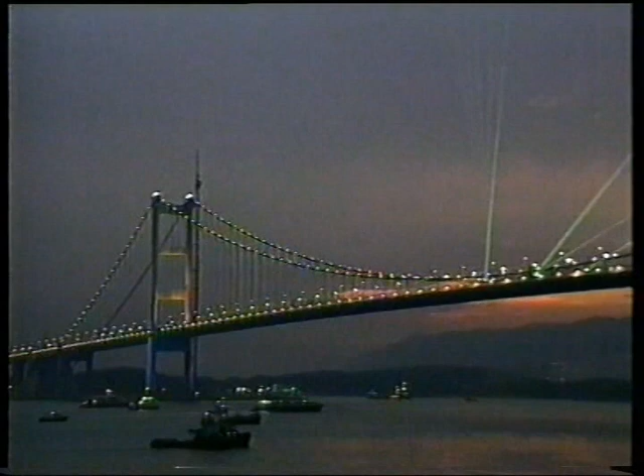The Tsing Ma Bridge, part of the Lantau Link, was officially opened by Lady Thatcher on the 27th of April 1997.

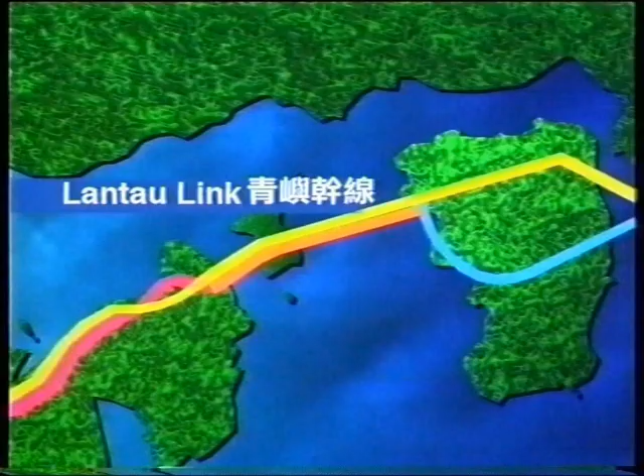The Lantau Link project was started in 1992 as one of Hong Kong's 10 massive infrastructure projects costing approximately 1.8 billion US dollars. Consisting of a suspension bridge, a cable-stayed bridge and a viaduct, the Lantau Link is the vital connection between the new Chek Lap Kok Airport and the urban areas.

The Tsing Ma Bridge, connecting the islands of Tsing Yi and Ma Wan, will be the longest road and rail suspension bridge in the world. With a span of 1,377 meters, it will carry 6 lanes of traffic on its upper deck and 2 rail tracks on the lower deck.

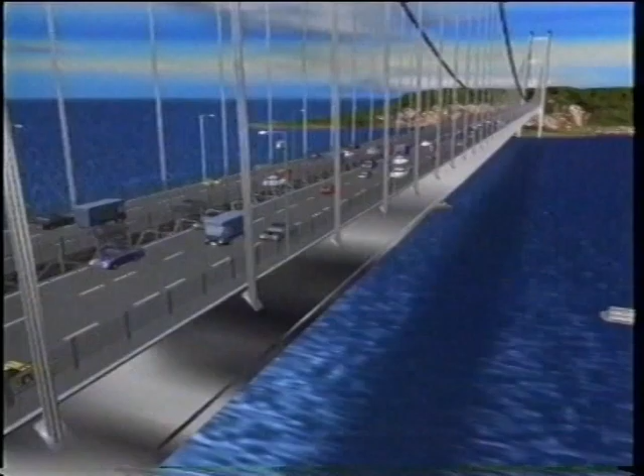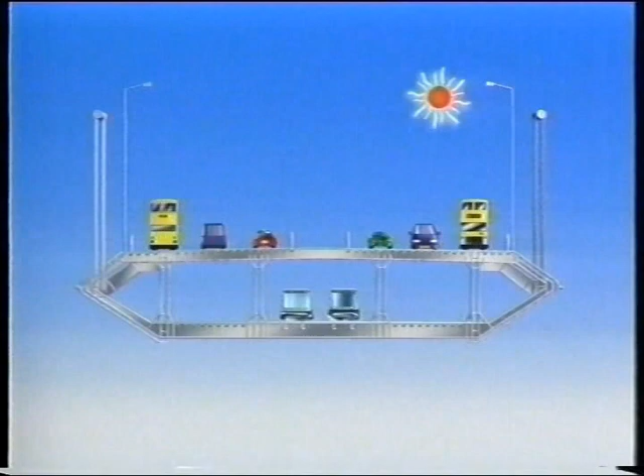As the bridge will be the only highway and railway link to Lantau, the designers made certain it would first provide free access under all weather conditions, second, be protected against collisions by ships, and third, be stable during high winds. Traffic will normally make use of the top deck, but under severe weather conditions, the bottom deck inside the box would be used.

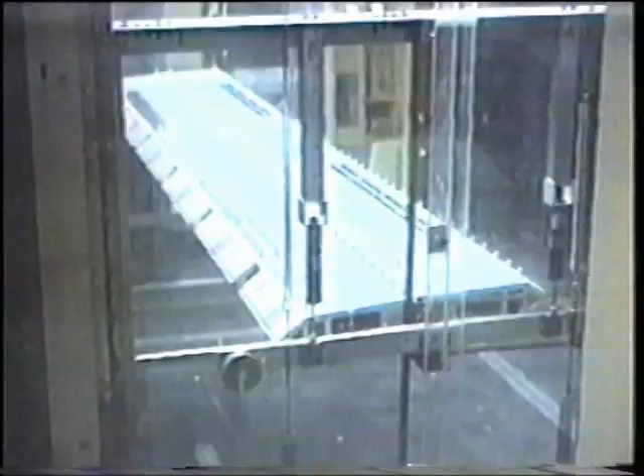Second, the bridge will be protected against possible ship impact. This is why the Tsing Yi Tower has been placed on land, and why the Ma Wan Tower has been located in shallow water surrounded by an artificial island. Third, the bridge has been designed to withstand the very high wind speeds experienced during typhoons. To make certain of this, extensive wind tunnel tests were carried out both in Canada and the UK.

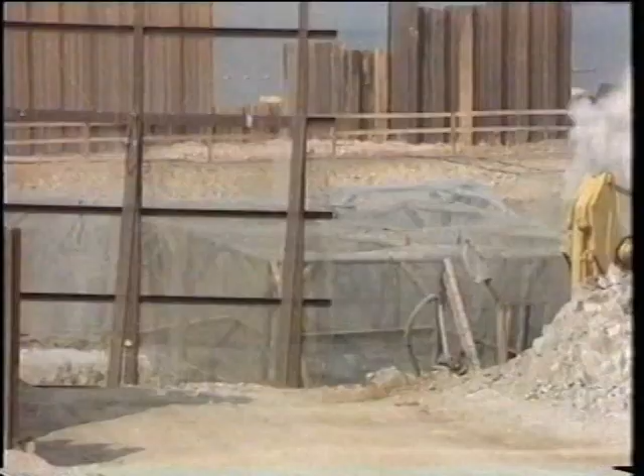Work began in May of 1992, and with its scheduled completion date of May 1997, the project will take 5 years to finish. To construct the bridge, the Highways Department of the Hong Kong government selected an international group of contractors who have built some of the longest and largest bridges in the world. The total value of the contract was 900 million US dollars.

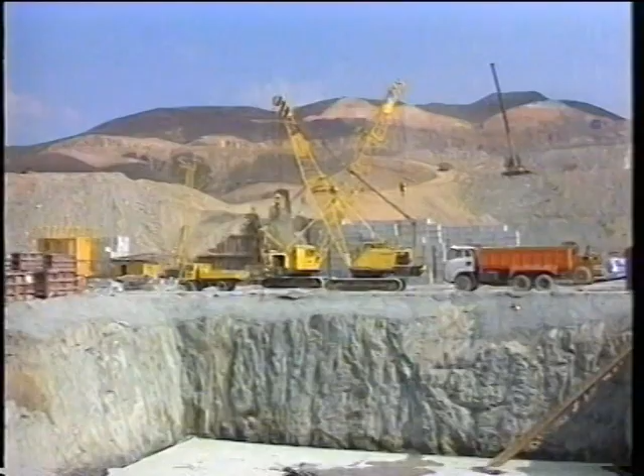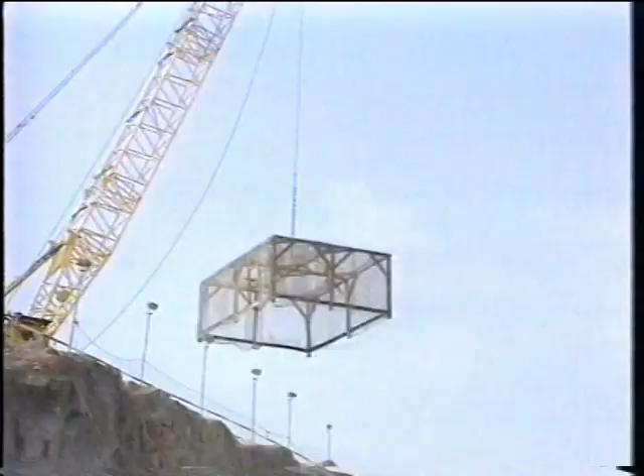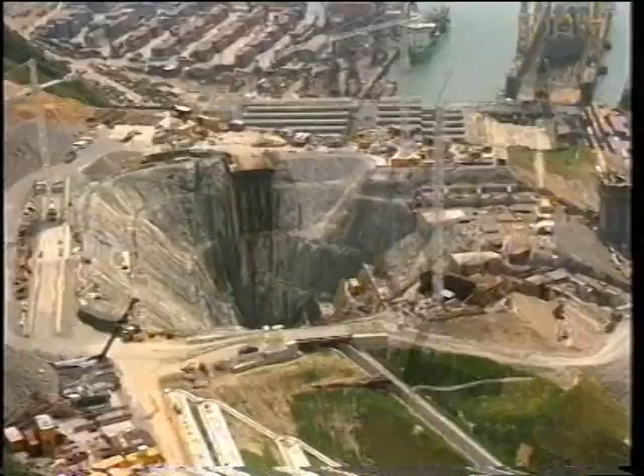Initially, the work involved an enormous amount of excavation below ground level on small, steep and congested slopes at each landfall. The largest excavations were for the 2 anchorages, which will restrain the load of the bridge's suspension cables. On Tsing Yi, a massive excavation 55 meters deep was carried out.

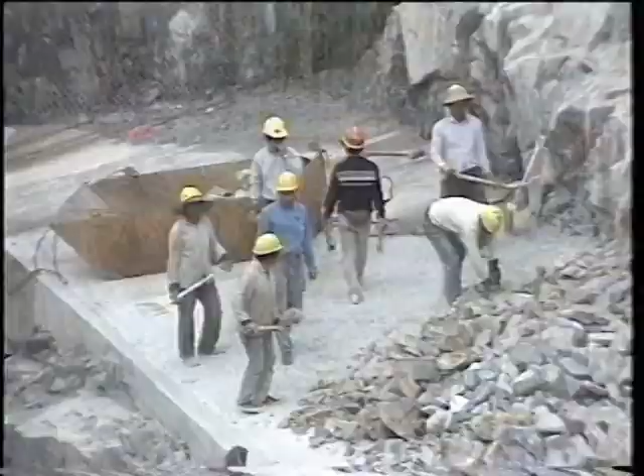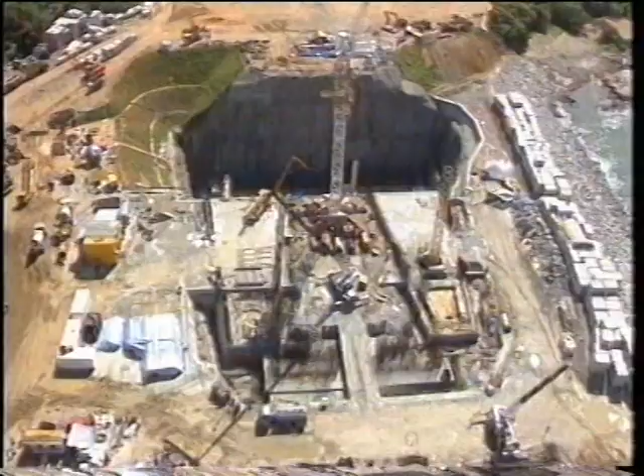At Ma Wan, the anchorage was partly underground and partly above ground. Below ground, the excavation went to a depth of 20 meters. Work has already begun on placing the basement and walls of both anchorages, which will eventually be filled with concrete.

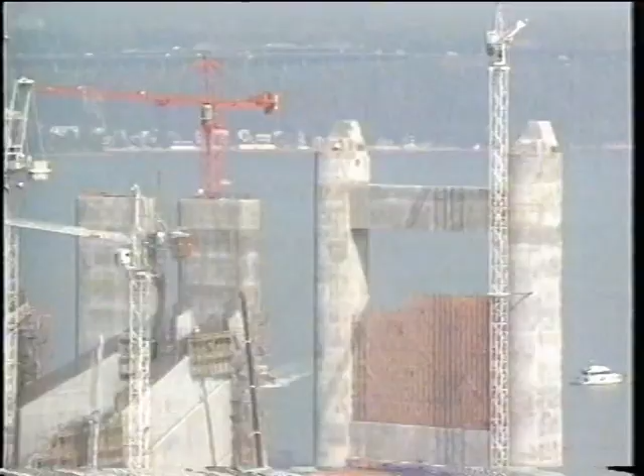The Tsing Ma Tower is on a spread foundation. Each leg of this tower is supported by a reinforced concrete footing 27 meters long, 19 meters wide and 7 meters deep, which rests firmly on solid rock. In the footing, all reinforcing steel bars have been epoxy coated to give additional protection from the marine environment.

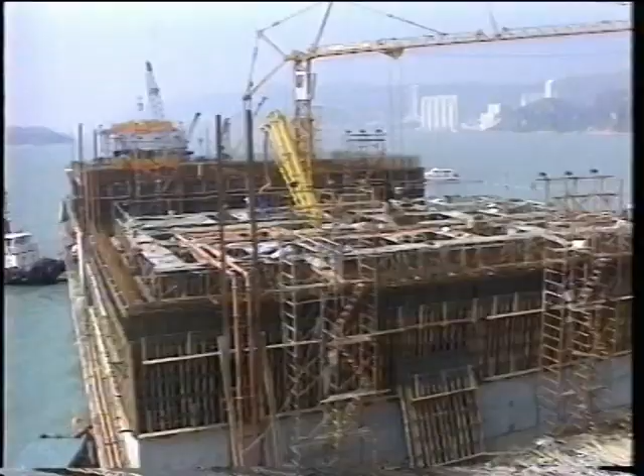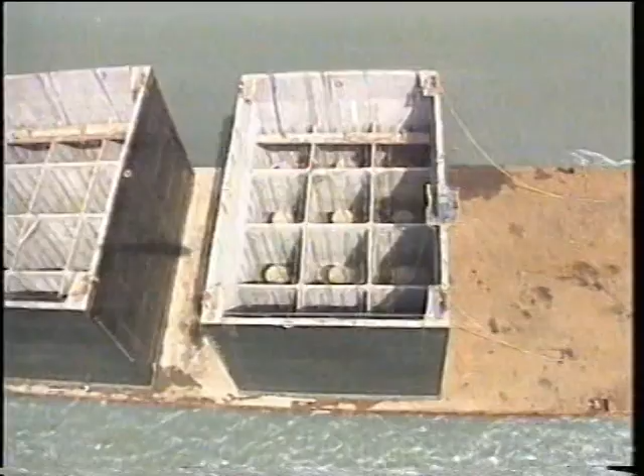Two huge concrete caissons, which will become part of the foundation for the Ma Wan Tower, were cast on the deck of a submergible barge anchored near Tsing Ma. Both are 28 meters long, 20 meters wide, with one 17 meters high and the other 19 meters high.

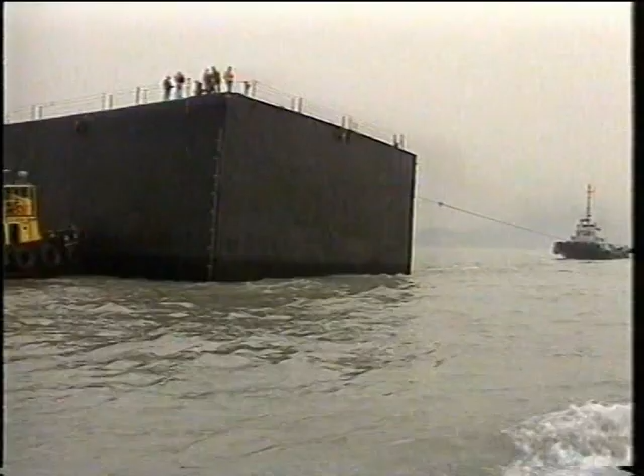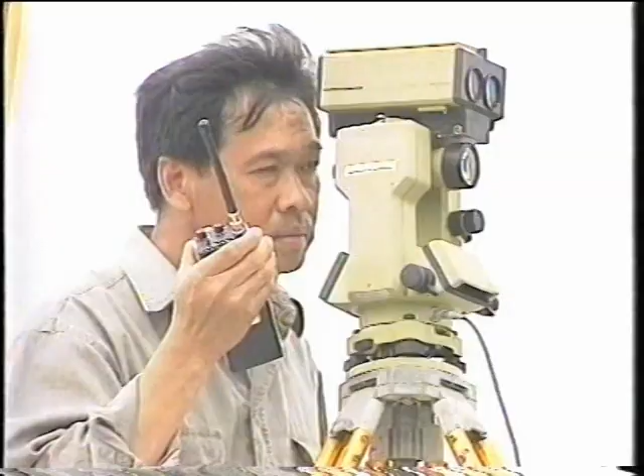The Ma Wan Tower foundation is located in shallow water of about 12 meters deep. Preparation work of the foundation included underwater blasting to flatten the area on which the caissons will rest. When the Ma Wan site was ready, the two caissons on the barge were towed to a site off North Lantau. After sinking the barge by adding water, the caissons were floated off. They were then towed to the Ma Wan site. At Ma Wan, the caissons were positioned and aligned properly.

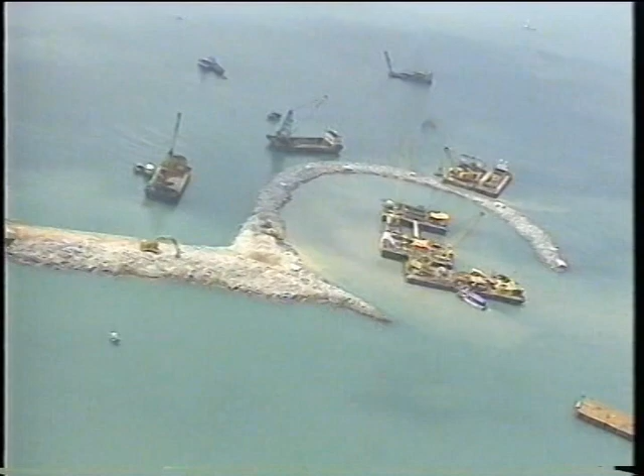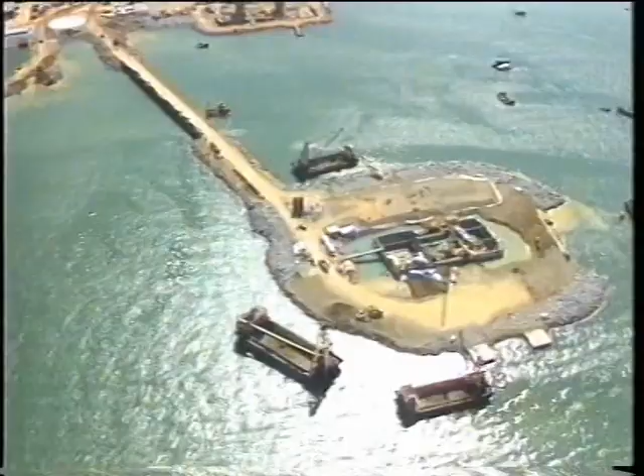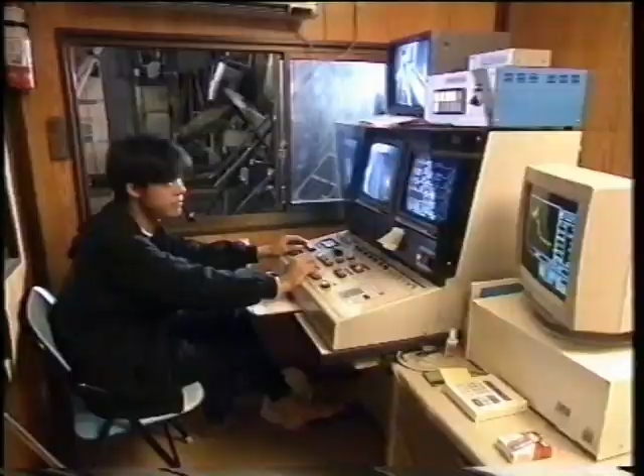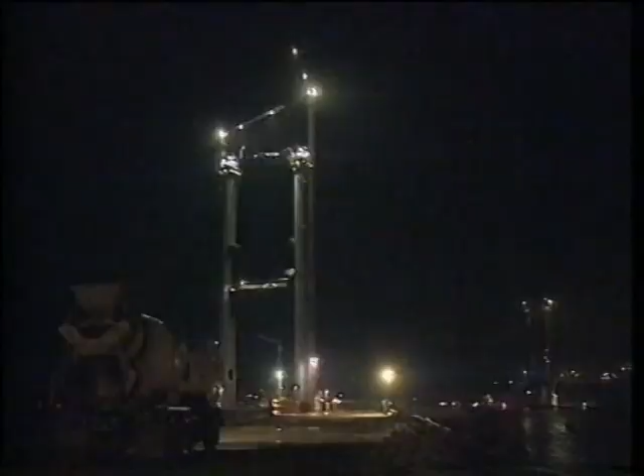To protect the tower from ship impact, rock and selected fill material was placed around the foundation of the towers to form an artificial island of an area about 4 hectares. The most prominent feature of the Tsing Ma Bridge will be its twin towers, each of which will stand at a height of 206 meters. These towers are made of high-grade concrete, which is batched in 2 computer-controlled plants on site. Using this concrete will make the towers capable of withstanding the most severe weather conditions.

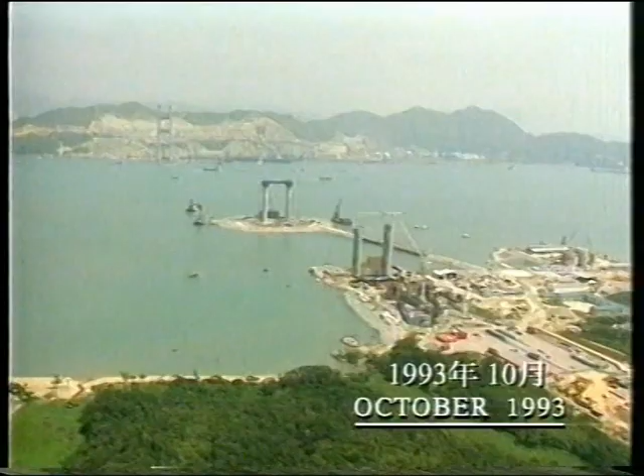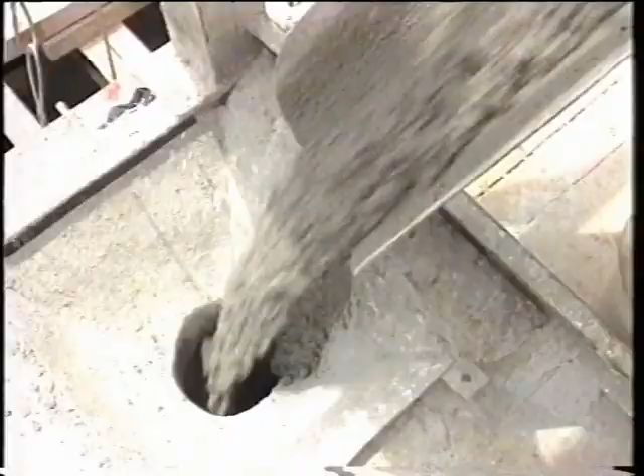The construction of the towers was completed in a period of only 3 months. This was made possible by concrete slip forming. That's a technique whereby you use steel formwork 1 to 1.5 meters high, and the concrete is placed inside and vibrated, and by the time the slip form moves vertically, climbing itself on jack rods cast into the concrete, it will be hardened or stiffened at the underside of the formwork. To ensure the tower's stability, particularly in high winds, portal trusses cast in concrete were installed between each leg.

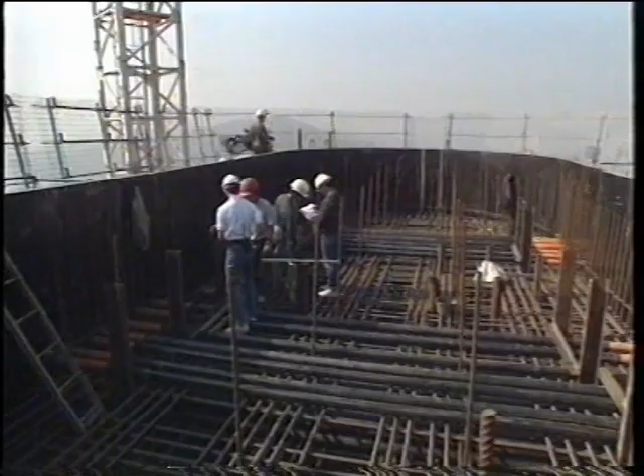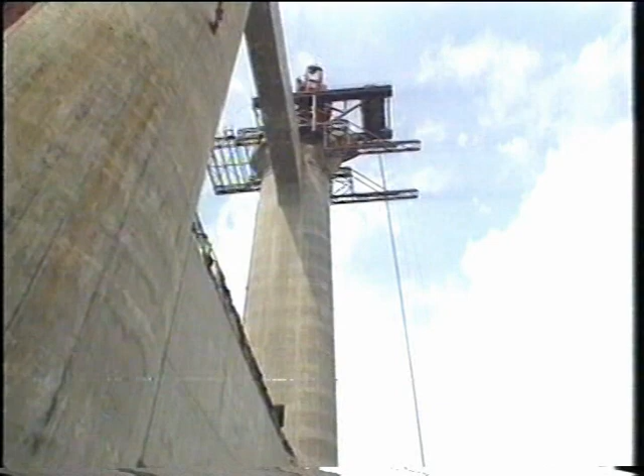The next step is to prepare the top of the towers for the installation of the large steel saddles that will support the main suspension cables of the bridge. A saddle is composed of 3 pieces. Each piece of approximately 130 tons was lifted up to the top of the tower by strand jacking technique. Once at the top, each piece is aligned and then bolted together.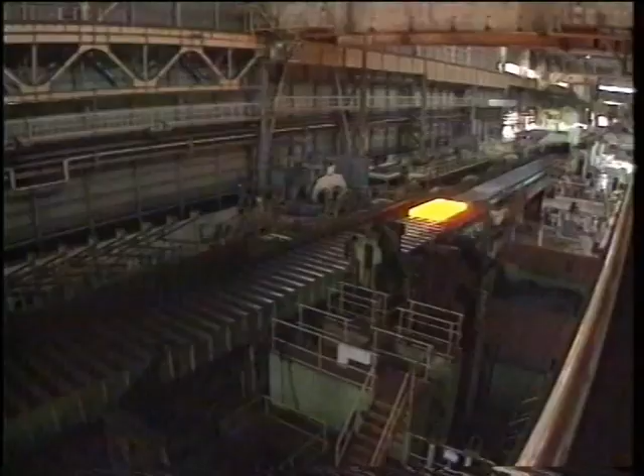In order to ensure the Tsing Ma Bridge is constructed on time and within budget, the staff of the Highways Department administers the project closely and normally holds regular meetings with consultants and contractors to monitor the construction progress. The international nature of the bridge extends not only to the engineering expertise involved, but also to the structure itself.

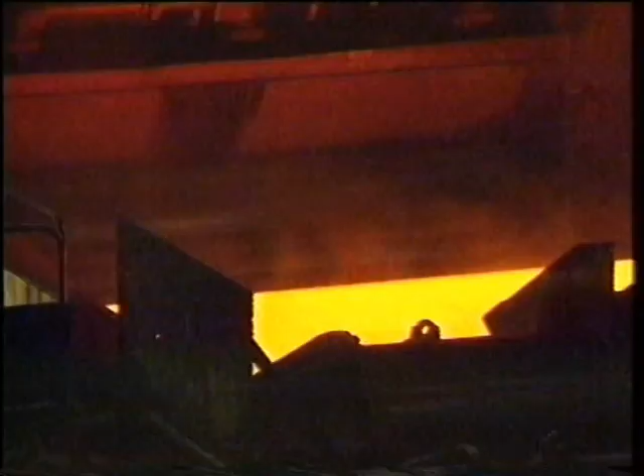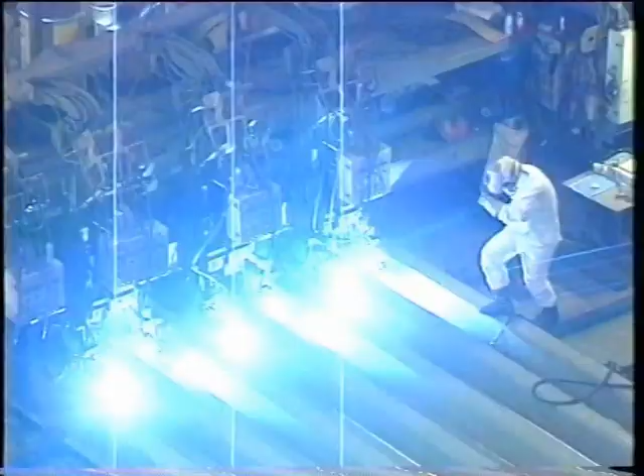In Japan, manufacturing and fabrication of the structural components, such as the trough and plate girders for the deck units, are being carried out. A large steel plate is first manufactured by hot rolling. Then it's flame cut into pieces with approximate dimensions for deck trough and plate girder fabrication. The deck trough is formed by upside-down welding of the trough to the deck plate by 6 heads welding simultaneously.

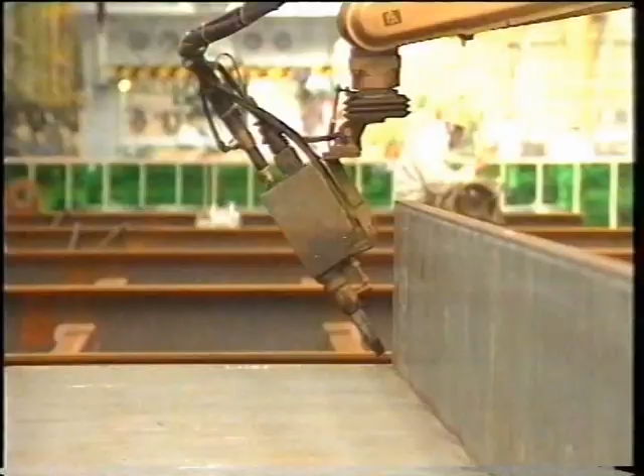This is the fabrication yard in Japan. Similar work is also being done in the UK, as well as machining of the cable saddles and their supporting grillages.

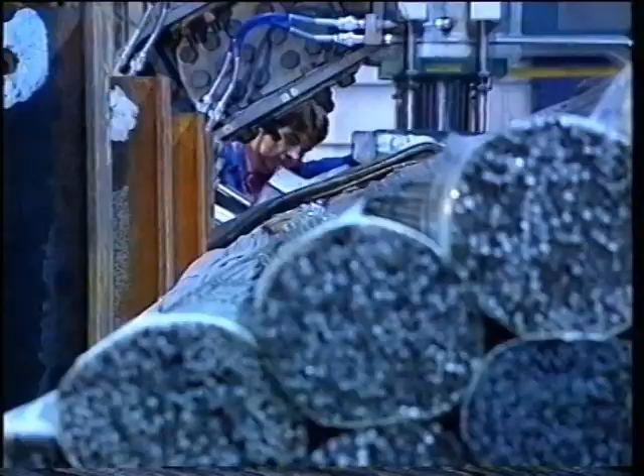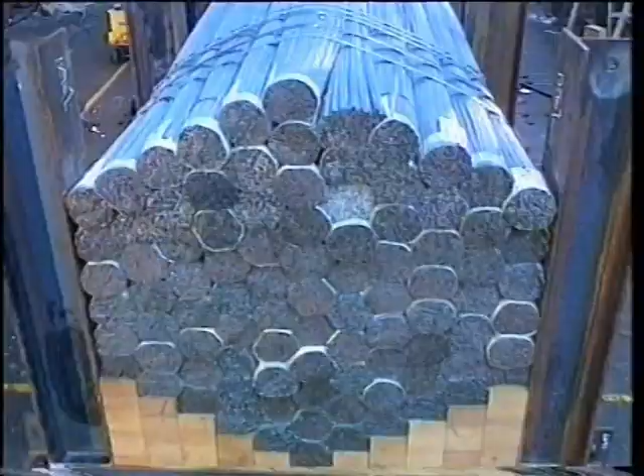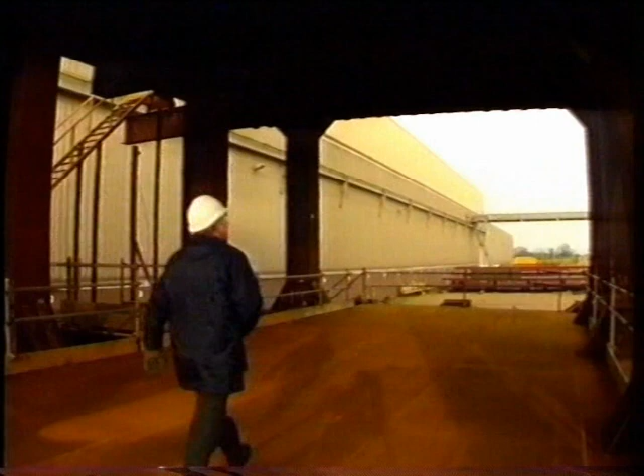A trial cable compaction for the 1.1 meter diameter main suspension cable was carried out. A trial assembly of a half section of a complete deck unit was carried out before the components are transported to the final assembly area in China.

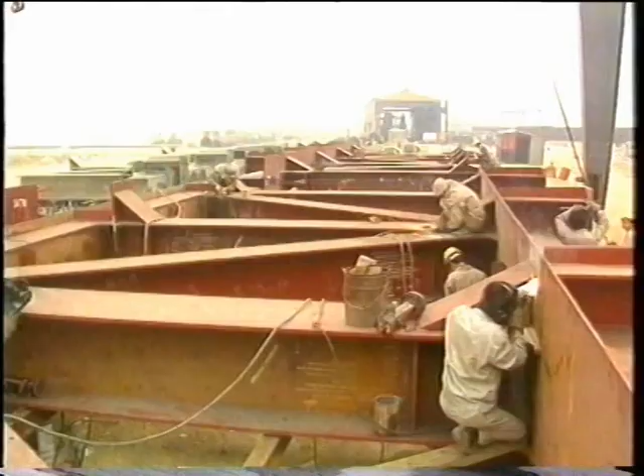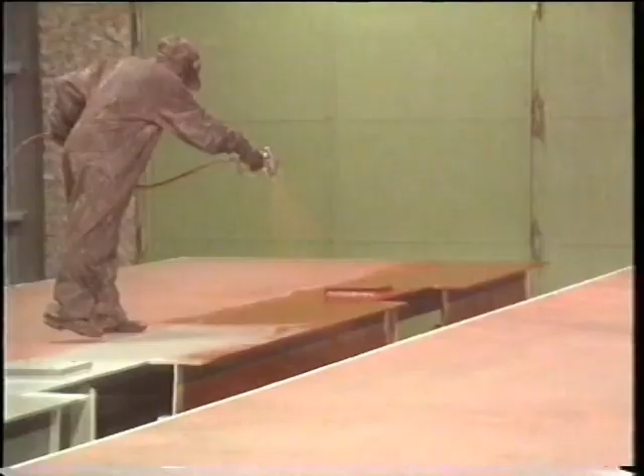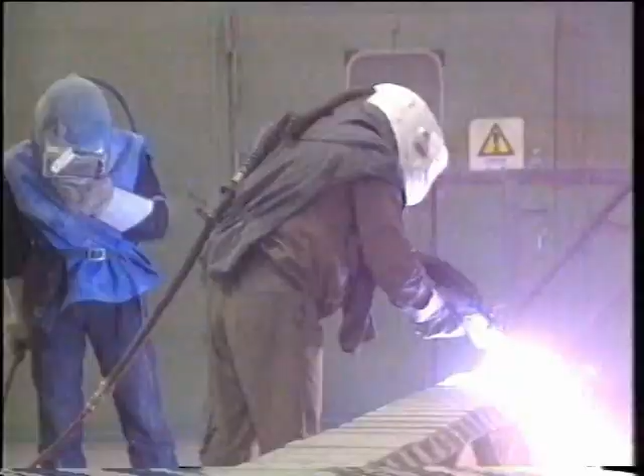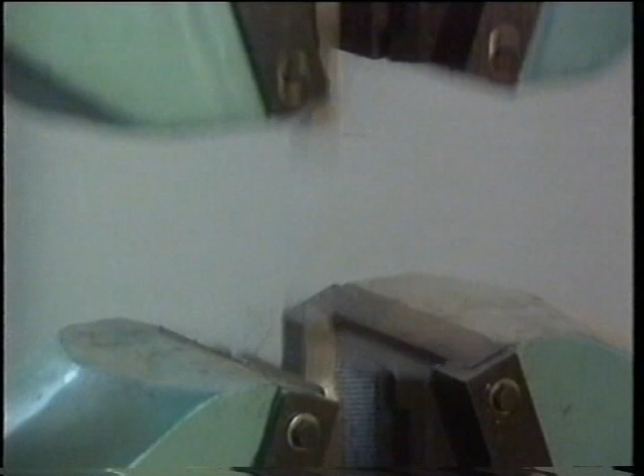The off-site work also includes China, where sub-assembly deck units are being assembled in a 400,000 square meters yard. This assembly process includes grinding of welded joints, washing and painting of sub-assembly units, checking plate thickness, assembly of outer truss unit, sample testing of weld strength and assembly of sub-assembly units.

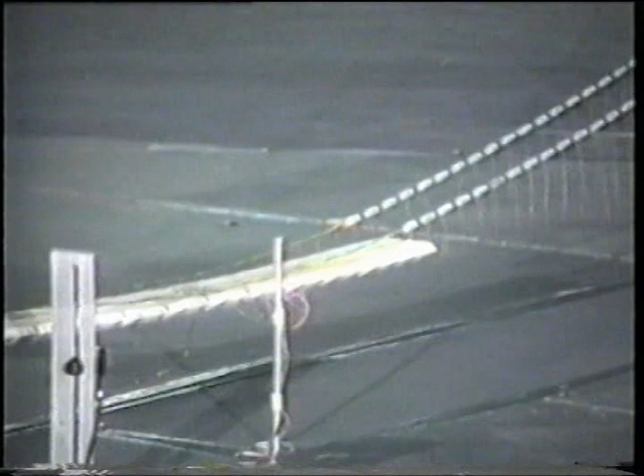In order to ensure the aerodynamic stability of the bridge under construction, extensive wind tunnel tests have been carried out in both the United Kingdom and Canada. In Canada, a full aeroelastic model of the entire bridge was tested by simulating topographic effects during the different stages of the bridge's deck construction period.

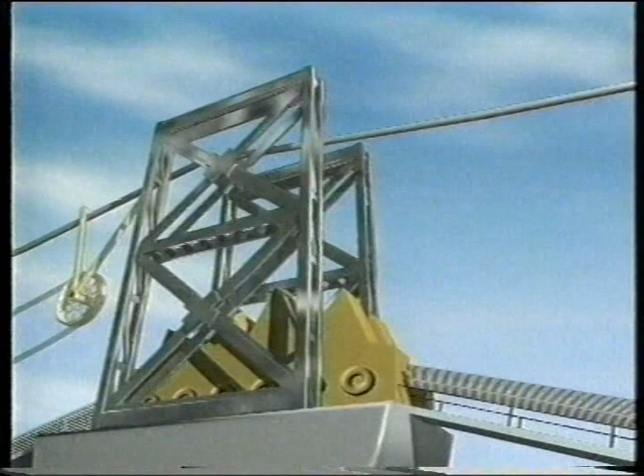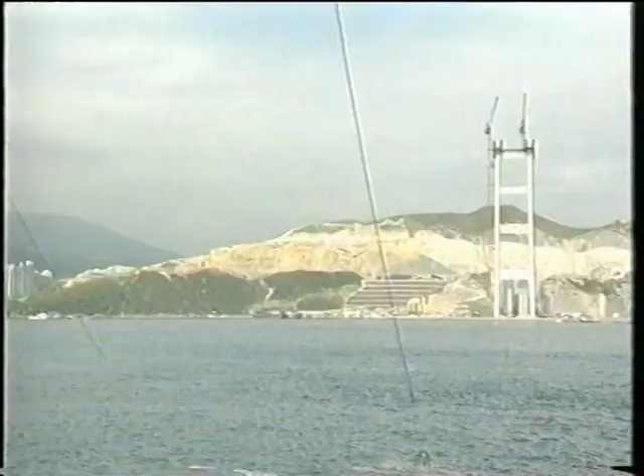Once the saddles were installed, the spinning of cables was about to begin. The cables were constructed by the aerial spinning process. The aerial spinning process involved drawing wires from a constant tension supply and pulling loops of these wires from one anchorage to the other. In the morning on the last day of March 1994, the first cable was in place.

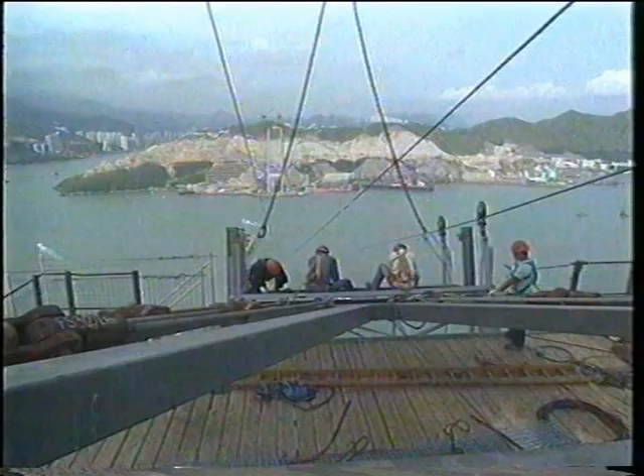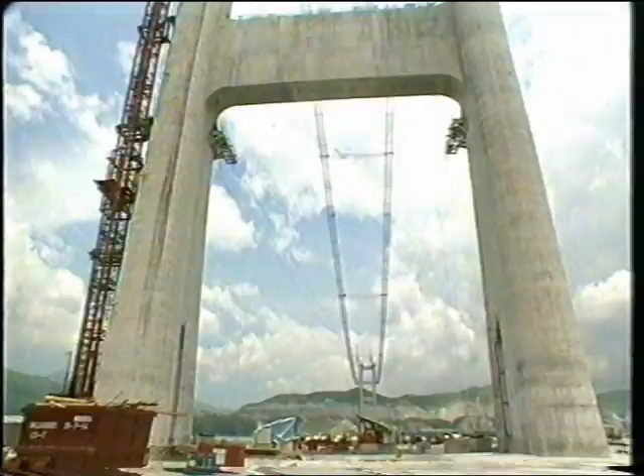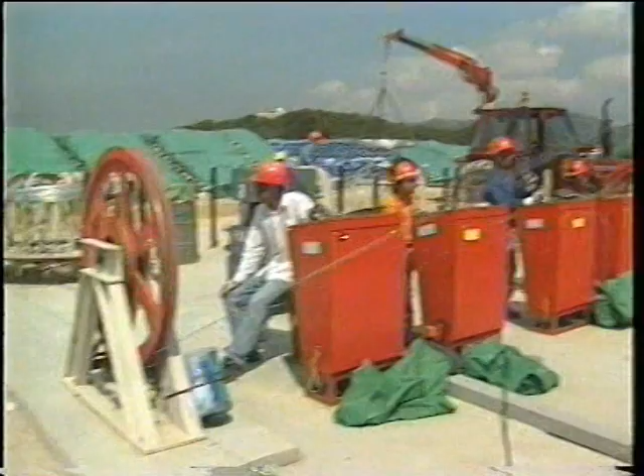Before this could be commenced, it was necessary to construct temporary footbridges from anchorage to anchorage along the line of each cable. Working platforms known as catwalks were suspended a meter below the cable positions to enable the workers to form the cables above the Ma Wan channel. This aerial spinning technique dates back more than a century, but this was the first time it has been used in Hong Kong.

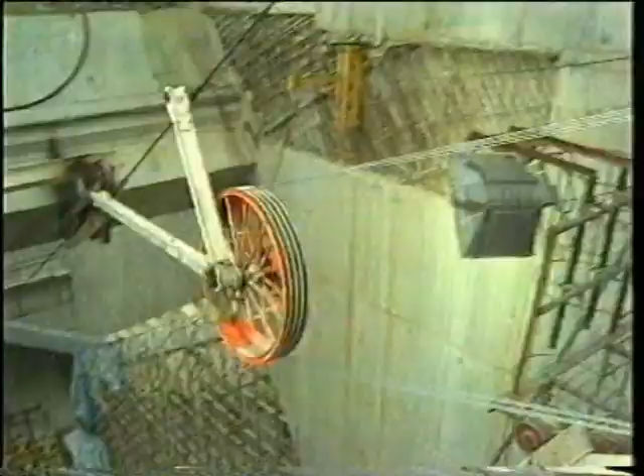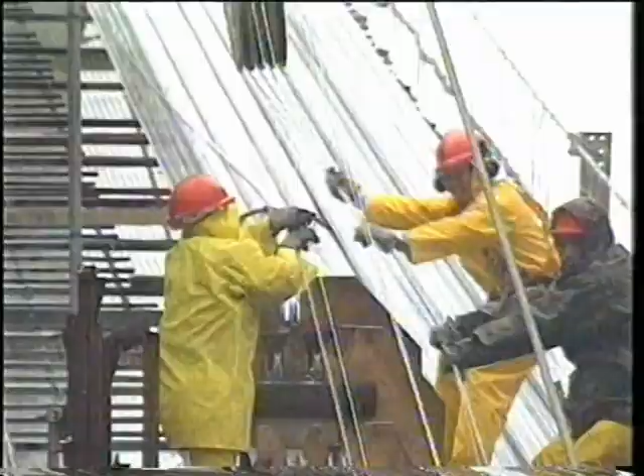On a system of pulleys, 4 loops of steel wires were drawn from the Ma Wan anchorage through the saddles, over the tower tops, all the way to Tsing Yi anchorage. For convenience of spinning and adjustment, the cables are divided into 91 strands of 368 wires. The process was repeated more than 8,000 times to form each cable of some 34,000 wires. The cables took 9 months to complete and support the entire bridge's weight of over 50,000 tons.

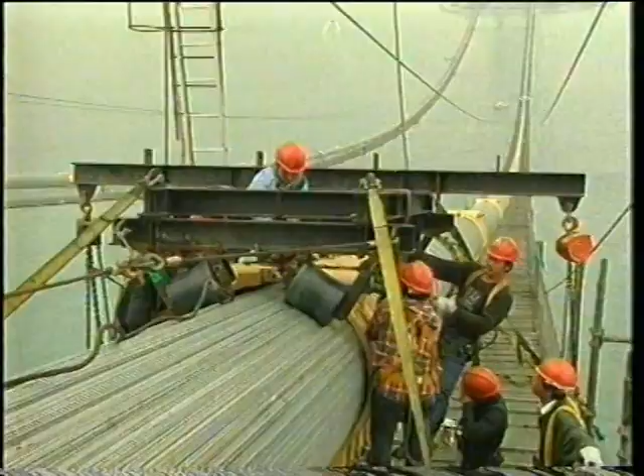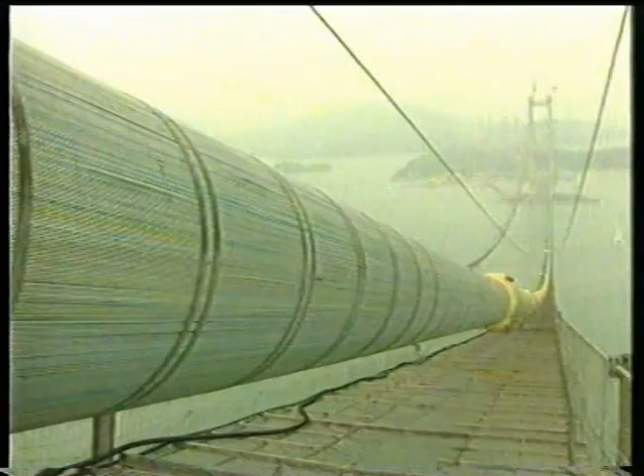Following the completion of spinning, each cable was compacted into a circular shape and bound with temporary strapping. The cable bands were then fitted, clamped into position by tightening the large high-strength bolts. The suspenders were then looped over them. Each cable measures 1.1 meters in diameter, and the combined length of the steel wires adds up to 160,000 kilometers, enough to circle the Earth 4 times. The next stage is to hang suspenders from the suspension cables so that they are ready to receive the bridge deck units.

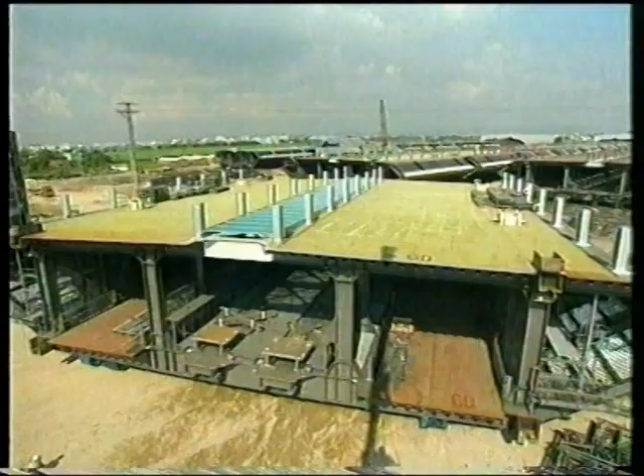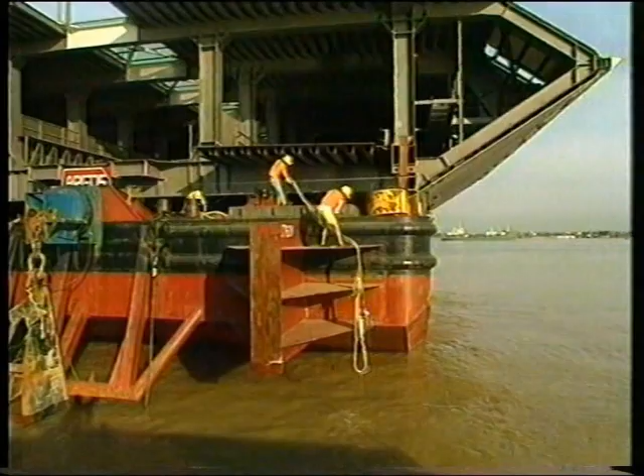Transporting the assembled deck sections to Hong Kong proved to be a mammoth task. Damage to any part of the assembly from strong winds would have held up the entire process. A specially designed barge was built to transport 2 deck sections at a time from the assembly yard to the bridge site. It was in the early hours of the morning of the 9th of August 1995 that the first deck of the bridge arrived from Dongguan.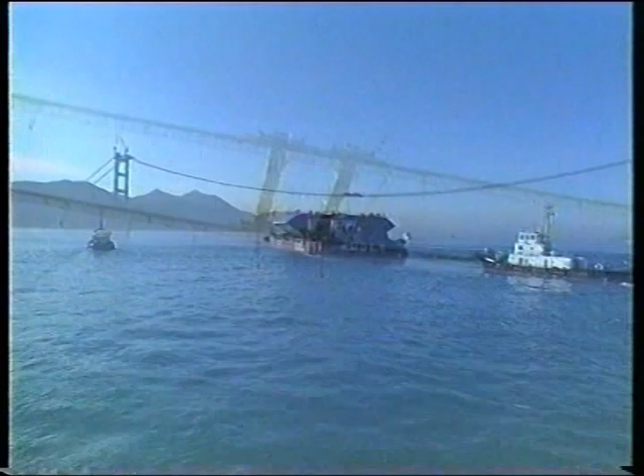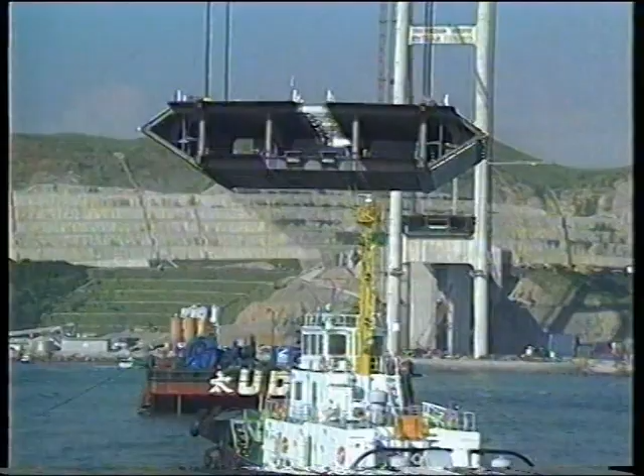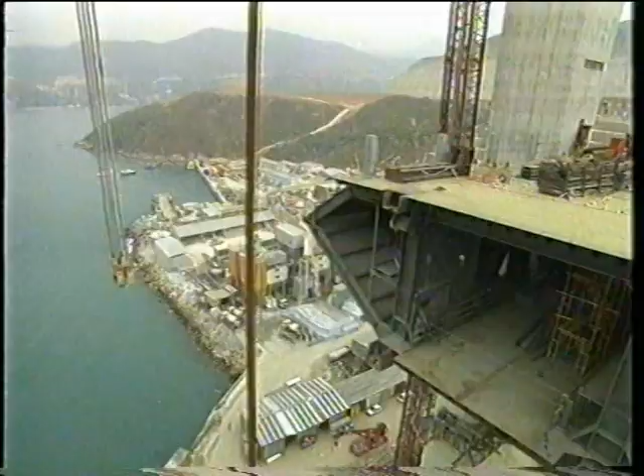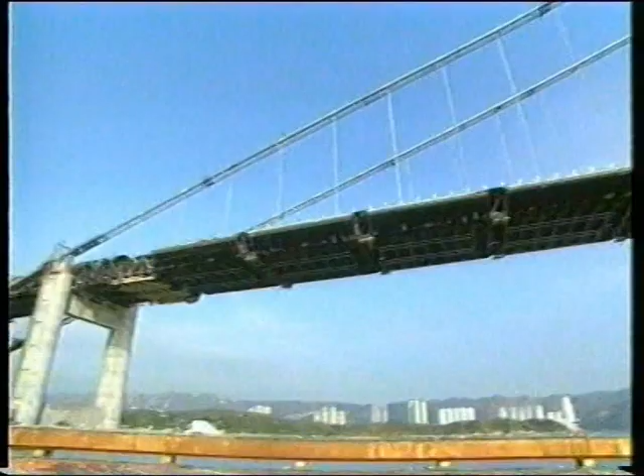The barge was moored directly beneath the bridge, and the deck sections lifted into their final position by lifting gantries standing on the main cables. The first deck section took 6 hours to install. The bridge is made up of 95 deck sections, each weighing 500 tons. It took 9 months to lift all deck sections from the barges on the channel. On the 28th of March 1996, the final deck section was lifted and the bridge was in sight.

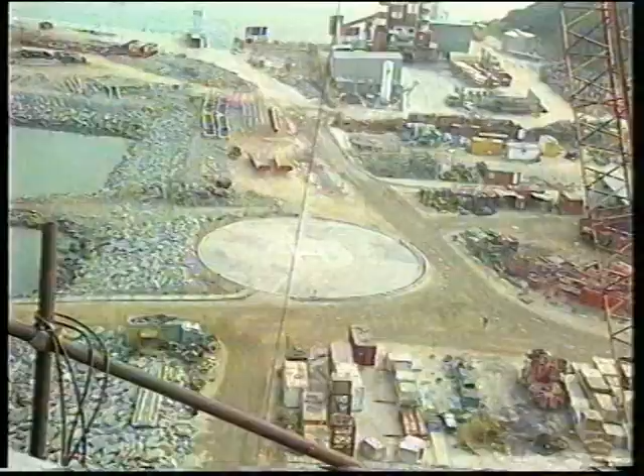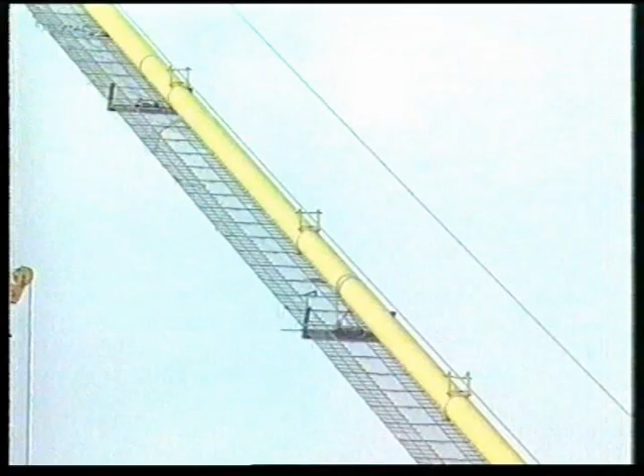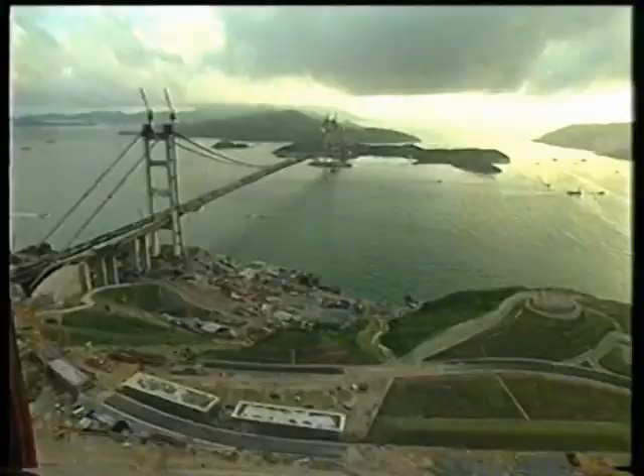The suspension cables were finally painted and wrapped. The purpose of the wrapping is to enclose the cable in a weatherproof sheath in order to protect and preserve the galvanized wires of the main cables. The rail tracks were laid. They were then leveled and fixed on beams supported by rubber pads. From the air, we could see the entire fixed crossing from Tsing Yi to Lantau taking shape. Yet there was still a lot to be done before the opening.

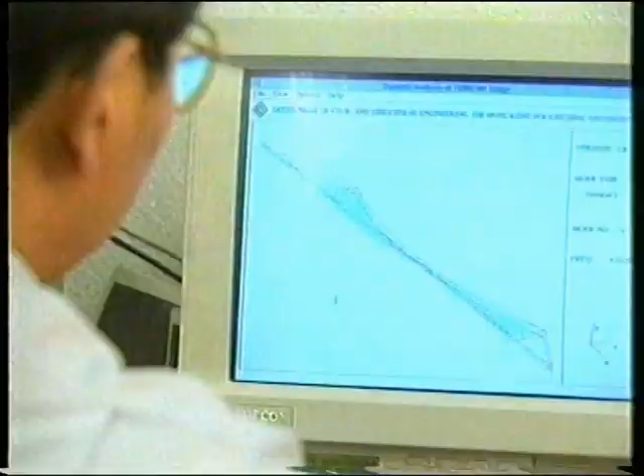Since Hong Kong lives under the threat of typhoons every summer, and there's traffic on both decks, as well as a high-speed railway on the lower deck, the bridge must withstand high winds, considerable weight, and vibration. Therefore, a well-designed bridge monitoring system is devised to monitor the structural performance of the bridges under various combinations of wind, temperature, and traffic loads.

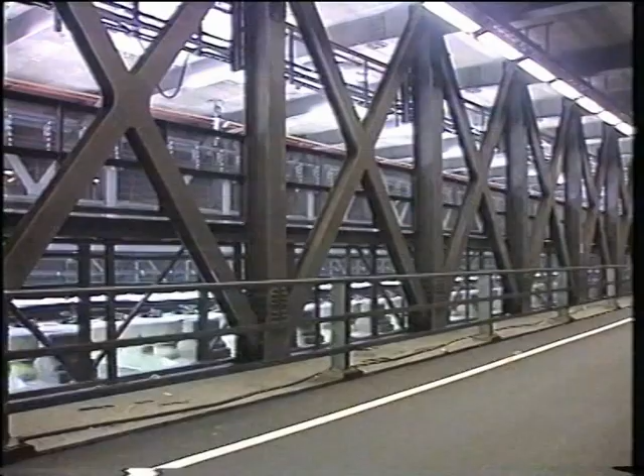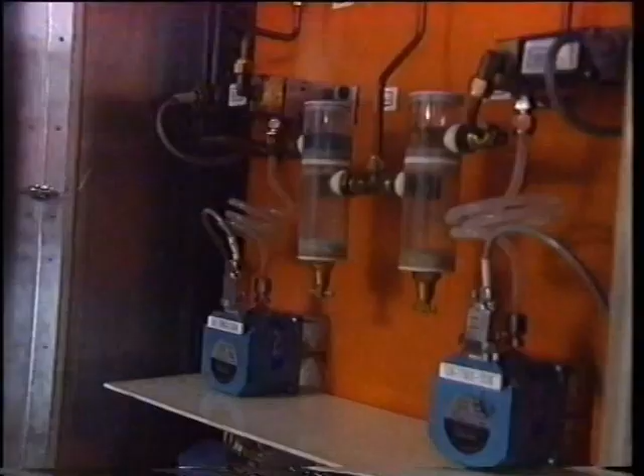Over the last year of construction, nearly 600 sensors were installed on the towers, cables, lower and upper deck units of Tsing Ma and Kap Shui Mun Bridge. These 600 sensors include anemometers, accelerometers, temperature sensors, displacement transducers, strain gauges, leveling sensors, and weigh-in-motion sensors.